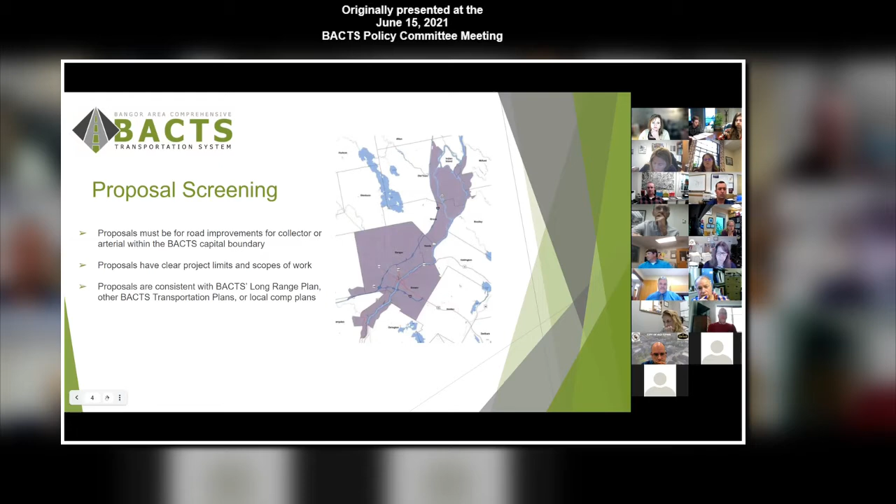There are two types of projects a municipality can submit. Those are roadway projects, which include reconstruction, rehabilitation, preservation, and standalone sidewalk projects. The second type is operation and safety improvements, or OSI. This category includes work being done to any part of a signal system, including ADA upgrades and improvements. Sometimes a project, depending on the complexity of it, may only be funded through the preliminary engineering stage in order to determine a good cost estimate.

All project types are scored against each other and can receive a maximum of 100 points. Scoring is based on a set of criteria. Those include traffic volumes, pavement condition, safety, and congestion. Applications can also receive points if they are on a preferred truck route, community connector bus route, are making improvements to pedestrian or bicycle facilities, or if this is a continuation of a project which was completed in the last 5 years.

After completing the scoring process, BACTS staff presents a project list to the TIP Advisory Committee based on the highest to the lowest score. The committee then develops a priority list of projects and recommends this list to the policy committee. Independent project estimates are then developed by a consultant.

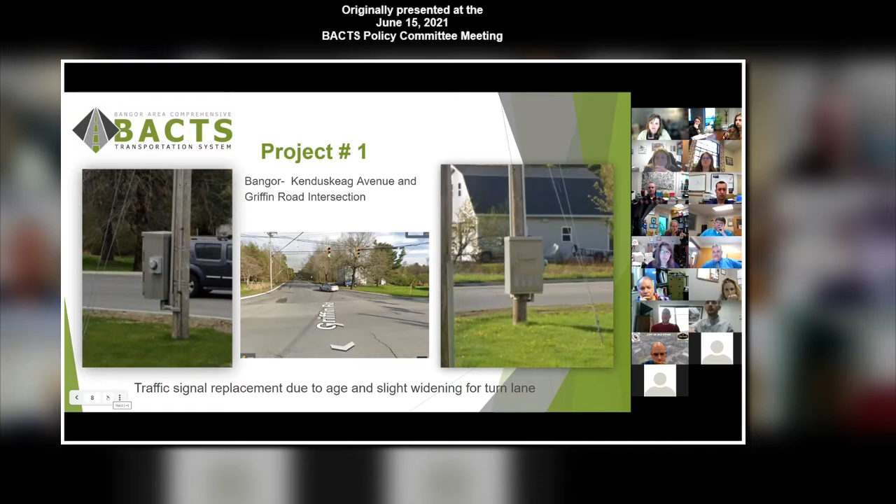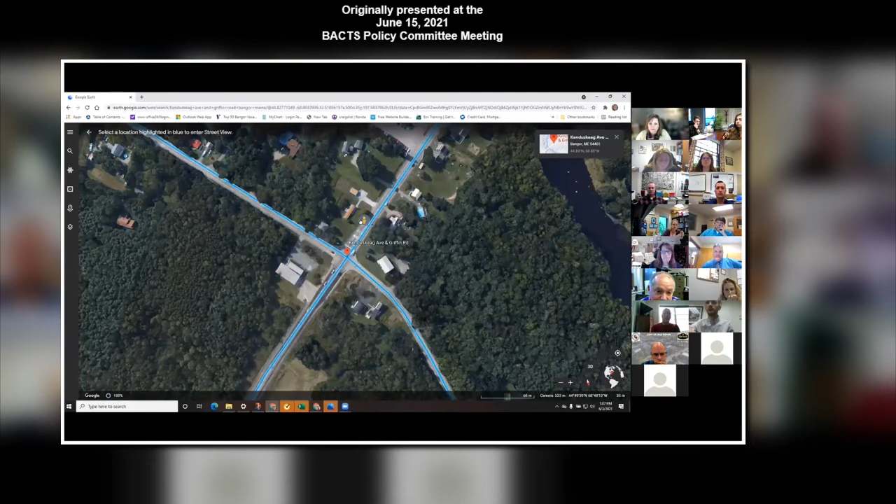Okay, this project is pretty much just a complete signal replacement, traffic signal replacement due to age and condition of the equipment that's out there. We also looked at considering a turn lane coming from Kenduskeag heading out of town. But I guess Sewall looked at that. I mean, this is a repeat project. It was in the scope last go around.

And they kind of ran what they had for traffic volumes at the intersection, and they said it didn't warrant a left turn lane. So we probably won't look at that right now, but when we place equipment for the traffic signal, we may place it so that if future widening is necessary, it can accommodate it. So that's about it for that one. Great. Anyone have any questions?

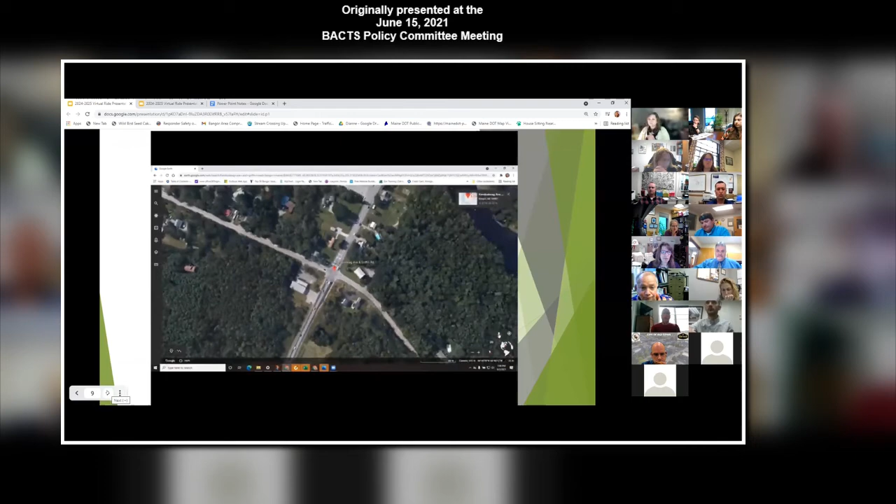Any questions for John? Okay, we'll move on to the next project. This is project number 2. It's a preservation project in Bangor and is located on Outer Hammond Street, beginning at the town line and extending to Hammond Street Extension. In these pictures, I've highlighted some of the distressed areas on this route.

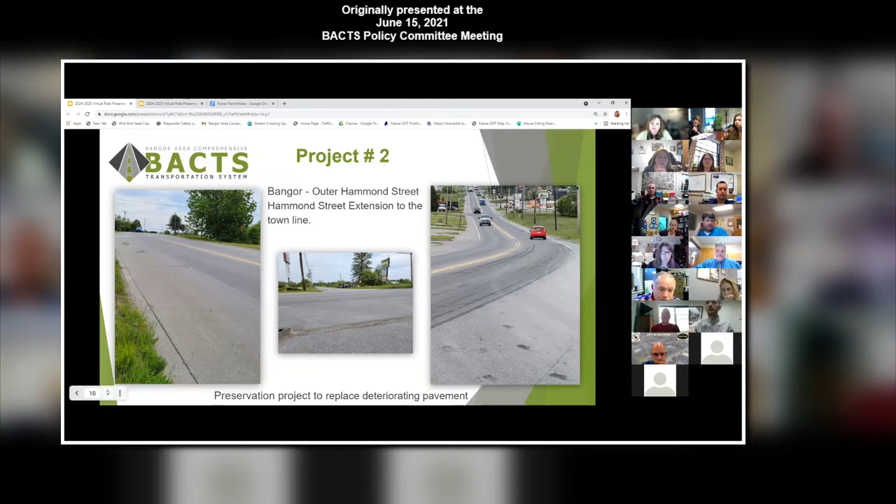And John, again, I'll turn it back over to you as I start the video. Yeah, the project is about 2,300 linear feet of roadway, or 0.44 miles. The roadway is typically about 40 feet wide out there, including the shoulders. What we're looking to do there is, I don't even think we need to mill the location. I think we'll probably look at just placing 1.5 inches of wearing course through the project limits, and that's about it. This is purely a preservation project to keep the pavement in decent shape.

I should have thought of more stuff to say since your video is longer than I could talk.

If anybody has any questions for John about the project, feel free to speak up. Okay, hearing no questions, we'll move on to the next project. This is project number 3. It is also a preservation project, and it's located in Bangor on Union Street. The project limits go from Davis Road to Griffin Road. And these photos show, again, some of the distressed areas that I found while out looking at the project myself.

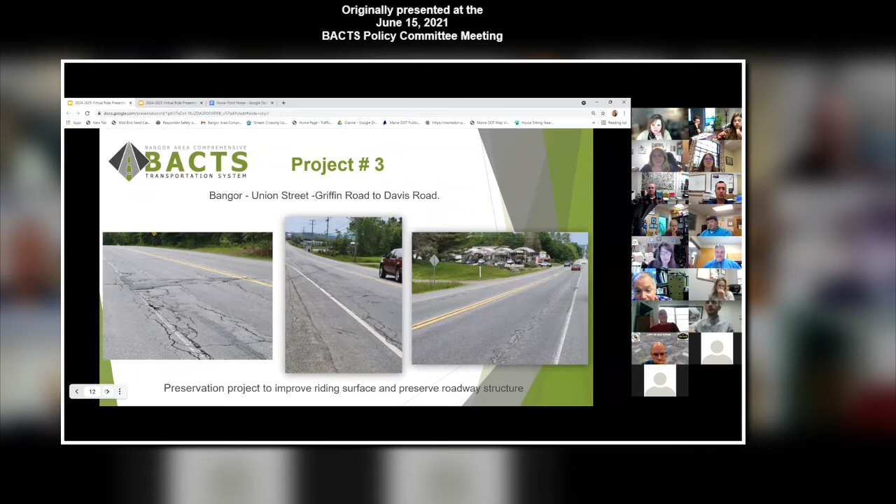Again, I'm going to start the video. John, go ahead and take it over and give us some detailed information. Again, this is about 8,000 feet of roadway, generally 40 feet wide. We're thinking it'll probably be a mill and overlay for the project. We've had a lot of complaints on this section of Union Street between Griffin and Davis Road, which is still in the compact area. DOT did a project not too long ago outbound of Davis Road. And if anyone goes out there and looks at it today, Public Works just did an overlay of this area, like a half inch overlay.

So it actually looks fantastic, but don't be deceived. This is something we had to do because it was in such rough shape. And hopefully in the future we get this thing funded. I don't know if Aaron has anything else he wants to add on that piece of roadway. Nothing to add, other than in the beginning there near Griffin, it is an extra lane. Yeah. It's a little bit wider. Yeah.

Okay. Does anybody have any more questions for John or Aaron? As we wind up the travel down here. All right. And you can see what John was talking about in the distress on the road. It was in pretty bad shape. So I was pleased to see some sort of pavement on it. And I went back out the other day. Yeah, we had received several phone calls. I think people were calling the state as well to bug them to do work on it, and they were bouncing them over to us. So it's definitely needed. And I suspect that little shim layer we put on will get us a couple of years. So when the project is available to be done, it'll probably tie in nicely.

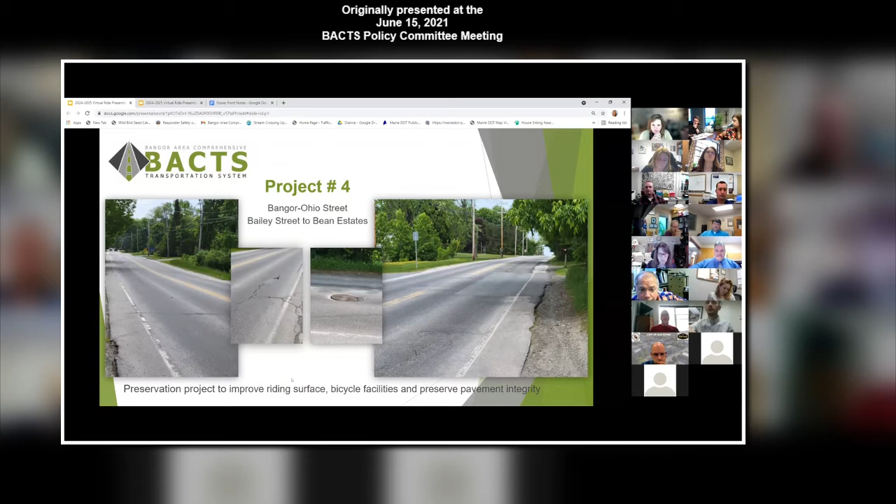Okay, and we'll go on to project number 4. Project number 4 is a preservation project located in Bangor on Ohio Street. This project starts at Bean Estates and extends to Bailey Street. As you see, again, I've highlighted some of the distressed areas on the road in these photos. And as I start the video, John, go ahead and take it over and give the details. So this is about 4,200 feet of pavement. It's typically 30 feet wide. It's in pretty rough shape.

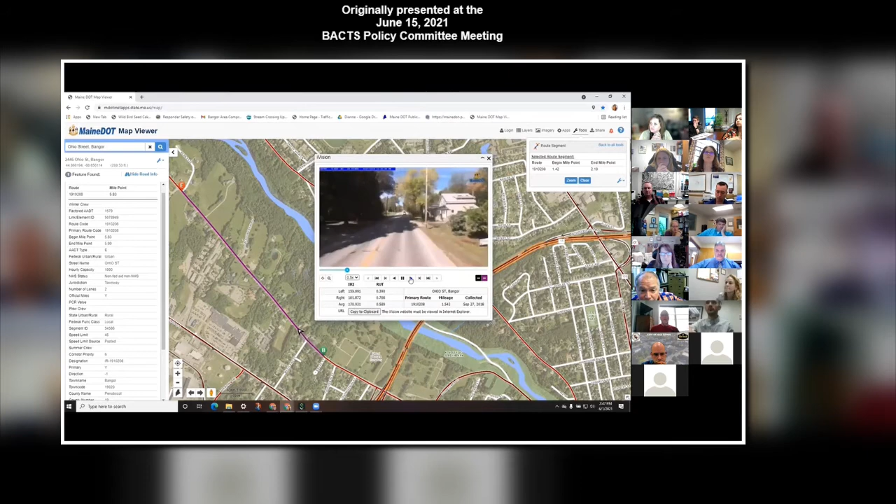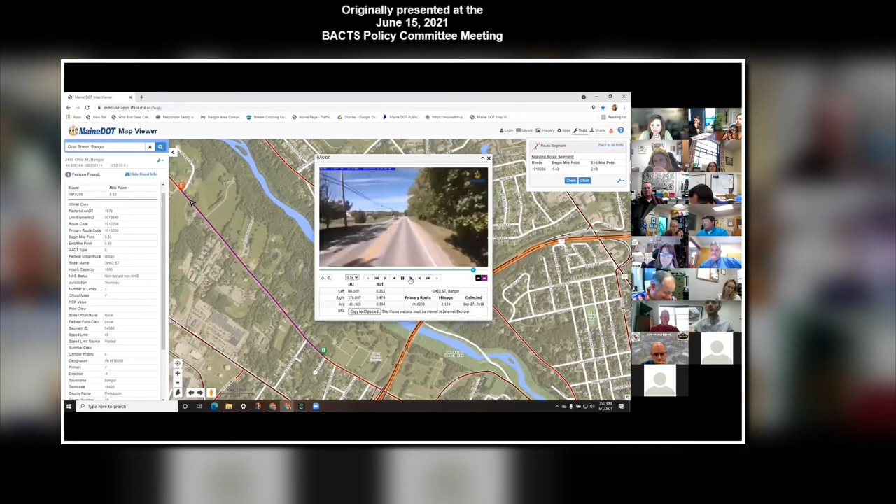There are locations where there's shoulder and then there's not shoulder, so it makes it challenging for bicyclists. So I suspect this will be a mill and overlay and possibly a shoulder widening to make the shoulder more continuous, to improve bikeability. There you can see it kind of falls apart in the video there. So anyhow, that's it. Does anybody have any questions for John regarding this project? All very, very needed projects. Yes. Okay. And we'll move on to the next one.

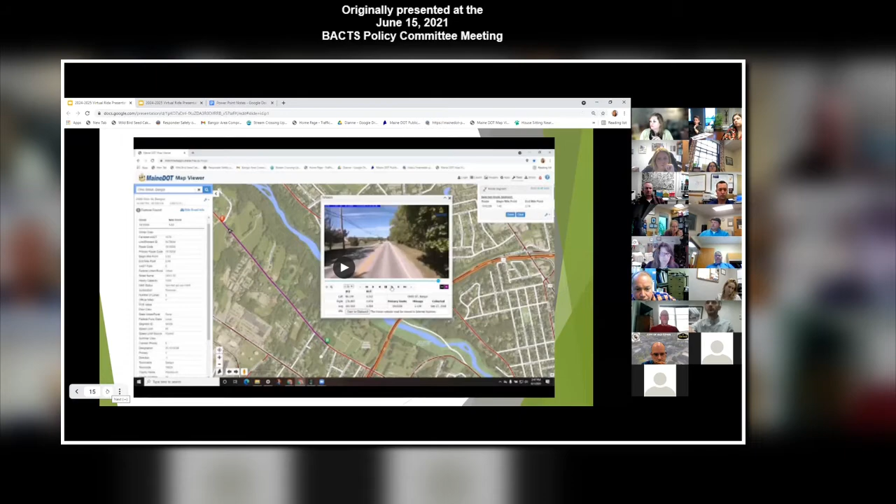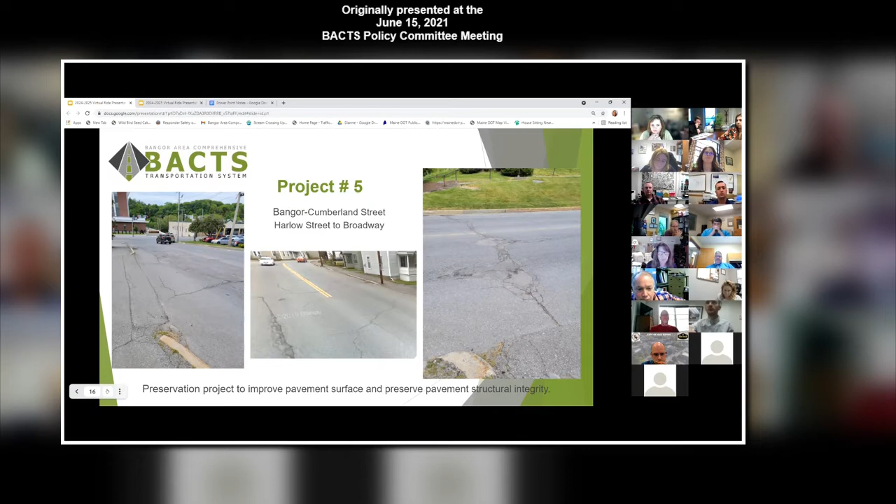Project number 5 is also a preservation project in Bangor. It is on Cumberland Street and it begins at Broadway and continues to Harlow Street. Again, here are some photos focusing on the distressed areas of this project. And just like before, John, go ahead and start your details and I'll start the video. All right, so this is actually an in-town project. It's much shorter, about 1,600 linear feet. Curb to curb width is about 30 feet.

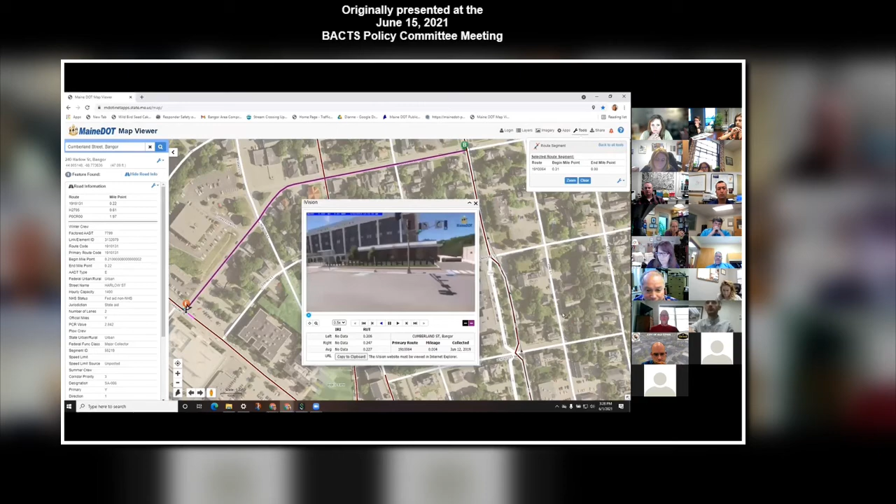I expect this will be a 1.5 to 2 inch mill and overlay in that area, and improve some of the drainage structures out there. We've got curb reveal that's gone in a lot of locations, so we'll probably do some relaying of granite curb and a little bit of sidewalk work out there as well. But with regards to the conditions of the roadway, this one appears to be one of the more severe conditions, at least when you go out there and ride it. That's it. Great. Does anybody have any questions for John on this one?

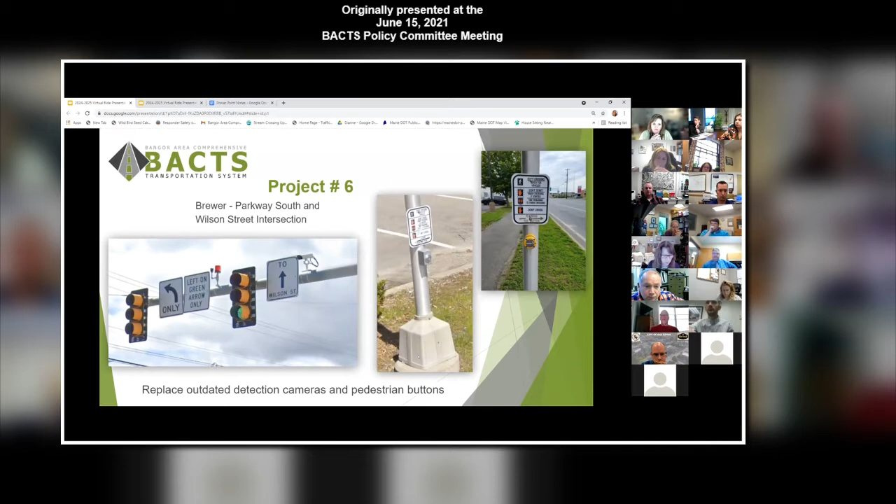Okay, we're going to leave Bangor now and head to Brewer with project number 6 in Brewer. This is an operation and safety improvement project in Brewer located at the intersection of Parkway South and Wilson Street. These photos here are just showing some of the items that will be replaced as part of this project, but I'm going to go ahead and drop into the intersection. And Jeremy, go ahead and take it away and give the details of the project.

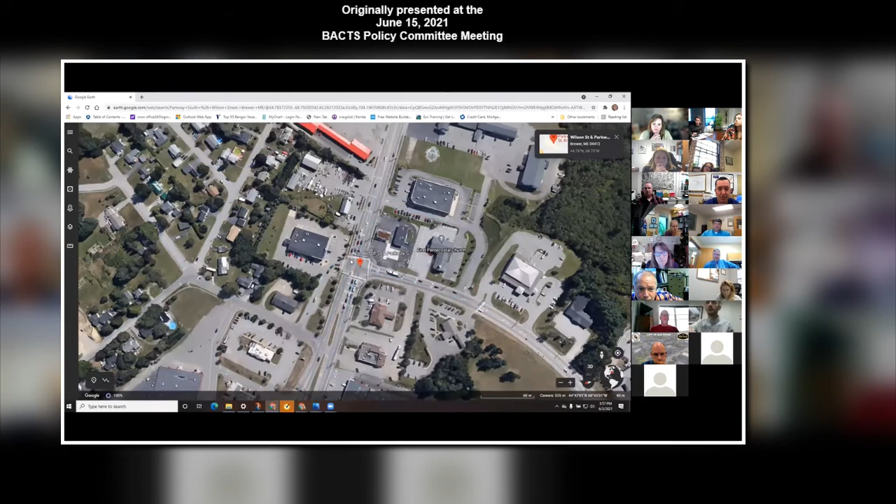Thanks, Diane. Yeah, with this one we're mostly looking at the PED buttons, which don't meet the current standard according to DOT, so we're looking to upgrade those. This is probably one of our heaviest used pedestrian crossings just because it's such a busy area and it's so hard to cross Wilson Street. So we'd like to get the appropriate talking buttons. As you can see from the video, it's kind of a mixed bag of PED buttons out there right now because we've just tried to make it work as best we can.

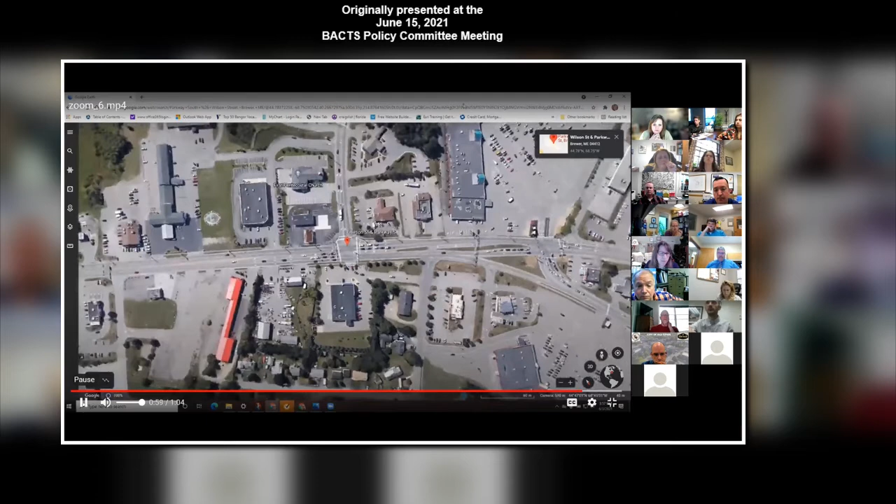And then also the cameras at this intersection are no longer supported by Econolite because they're so old. So we'd like to upgrade these cameras to get a new camera that would be supported. That's about it for this intersection. Great. Thanks, Jeremy. Anybody have any questions for Jeremy on this project? All right, we'll move on to the next project.

Project number 7 is a preservation project located in Brewer on State Street, and the project limits span from the Penobscot Bridge to Eastern Avenue. These are some areas of distress as well as some ADA improvements that Jeremy talked about somewhere around Washington Street. I'm going to go ahead and start the video, Jeremy. You can go ahead and provide us with the details of the project.

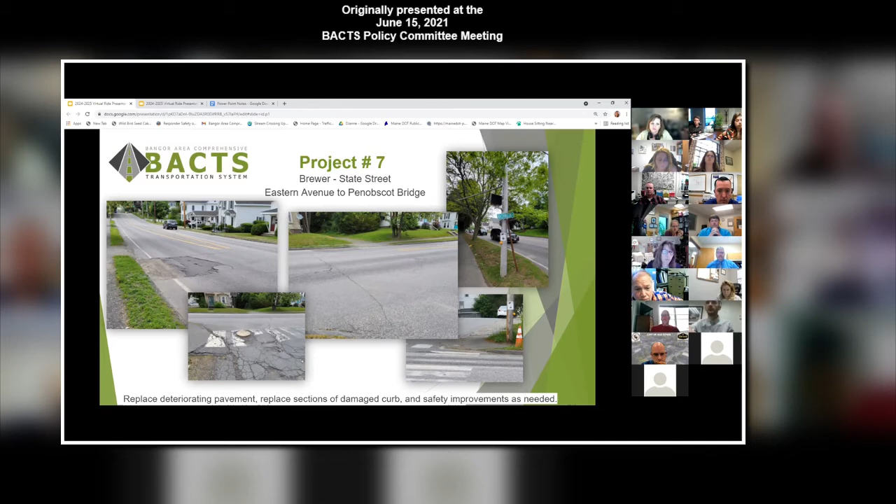So on State Street, we've got a lot of utility patches that have happened over the years, and the road is in very bad shape. And coming up the hill from the Penobscot Bridge, there's just such heavy turning traffic. It's getting worn out pretty well, making that corner up on North Main Street heading towards Route 9. At State and Washington, there's some ramp work needed, and then we'll update those pedestrian crossings as well so that they meet current standards for DOT.

And this project would tie onto an MPI project that we're doing next year that will finish up State Street. Great. Does anybody have any questions for Jeremy regarding this project? Okay, moving on to the next.

Project number 8 is a preservation project also located in Brewer. It's on Parkway South. It begins at the I-395 bridge joint and extends to Wilson Street. These photos again show some highlights of some areas of distress, as well as ADA upgrades near the high school and the I-395 ramps. And Jeremy, I'm going to go ahead and start the video and you can go ahead and give us details.

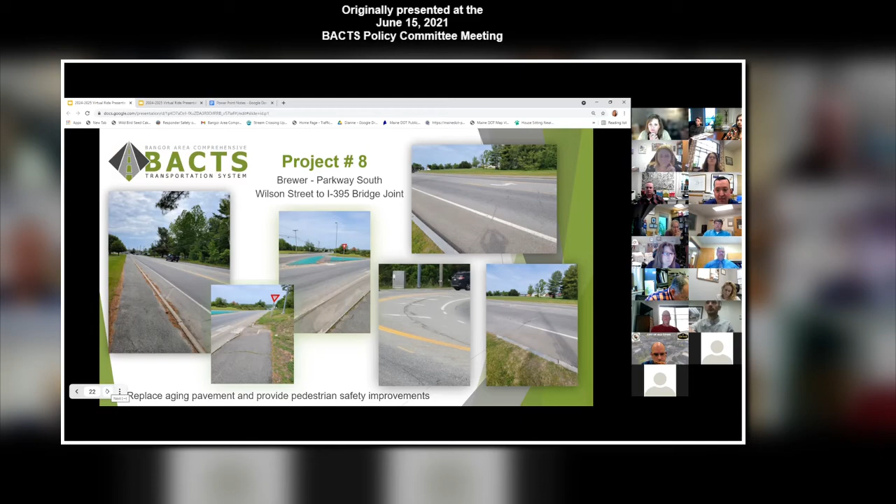And then also by the high school, because that crossing crosses at an angle and it's a very long crossing, they were hoping to create a new ramp area and put in an RRFB, because it's a heavily used crossing right there to go from the high school back and forth to different areas along Dirigo Drive and so forth. So those are the safety improvements that they'd like to see done over the next few years. So we thought it would make sense to package them in with this whole project.

And you can go ahead and talk more in regards to the actual pavement piece now, if you want. Sure. So similar to Bangor, we last year put a Band-Aid on this area to make it last, hopefully for a little bit longer. High used area, we've got some bad wheel rutting starting to happen on the center 2 lanes.

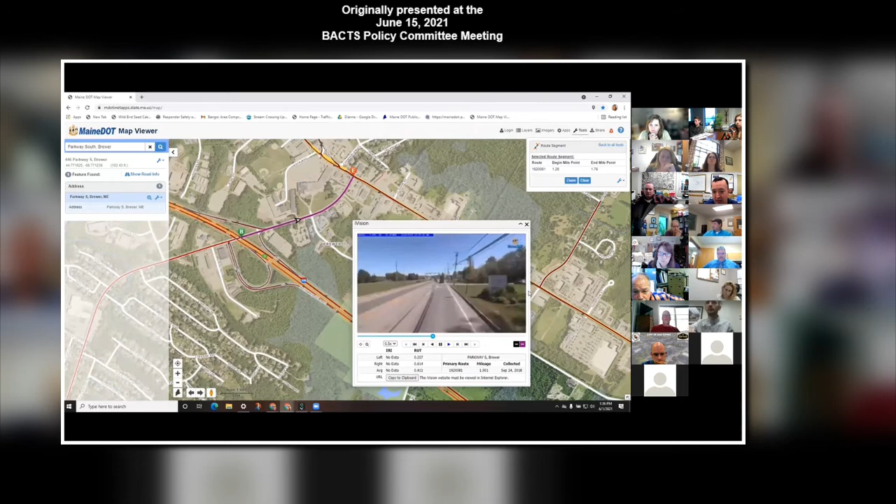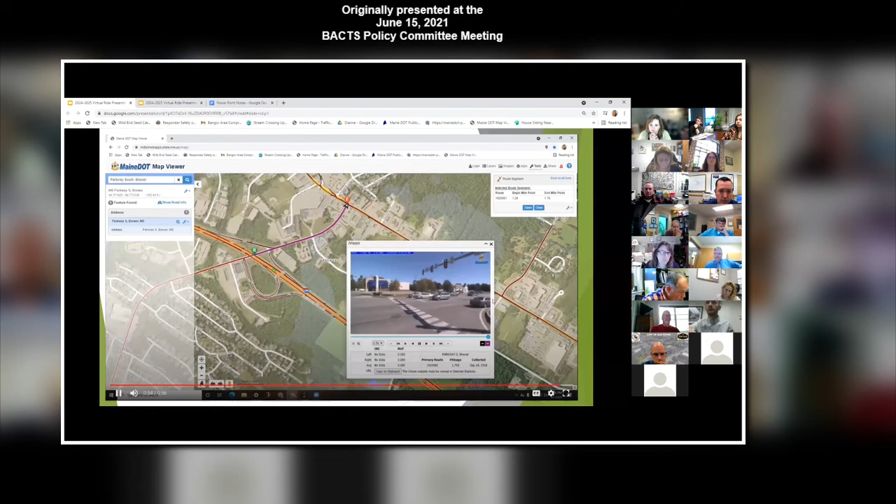Looking to probably do a 1.5 inch mill and fill this whole area here. We have some joints coming apart when we get closer to the intersection. But yeah, looking to do a 1.5 inch mill and fill through here. Great. Does anybody have any questions for Jeremy on any of the pieces of this project? Okay, we'll move on to the next one.

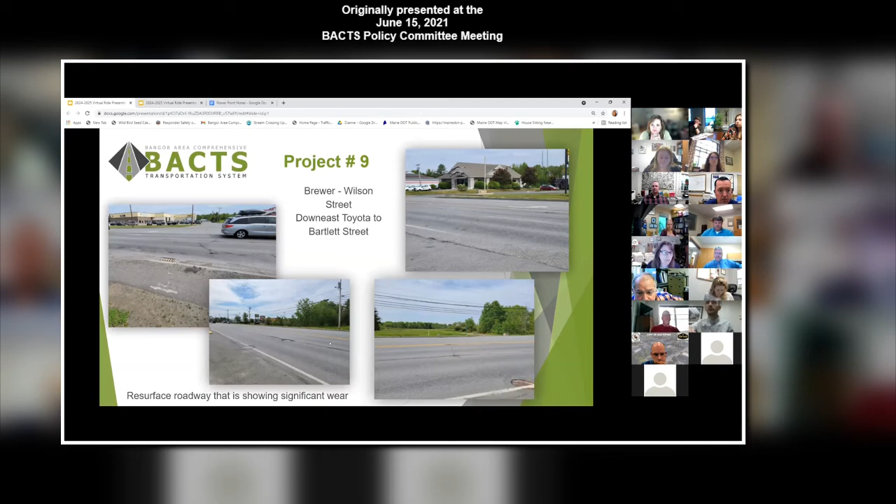Project number 9 is a preservation project located also in Brewer. It's on Wilson Street, and this project begins at Bartlett Street and continues to Downeast Toyota. These photos again are showing some areas of serious distress. And Jeremy, I'm going to go ahead and start the video. You can go ahead and give the details of the project.

So this is a continuation of the last phase of Wilson Street we did that was in very bad shape by the time we got it repaved. We're seeing a lot of the similar issues that we were seeing on that road, a lot of rutting, a lot of joints coming apart, and we're trying to maintain it with patching right now. We do have a few areas that just keep opening up, particularly by the car wash is a bad area for us.

And then we also have a few repairs that were done by Bangor Gas and Water Department and so forth, and those trenches are settling and opening back up. So it's a constant maintenance nightmare for us. Great. Does anybody have any questions for Jeremy regarding this project?

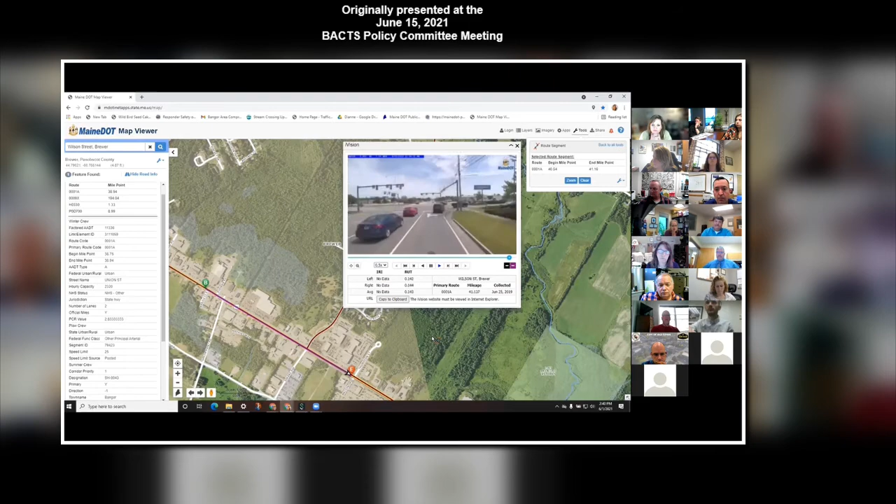However, I do need to say, when I went up to ride this project, I thought I had a flat tire. So much so that I stopped, got out, looked at all 4 tires, only to discover it was not a flat tire, it was the road. I'm going to go ahead and start the video, and Rob Yerxa, I'm going to turn it over to you to give more details.

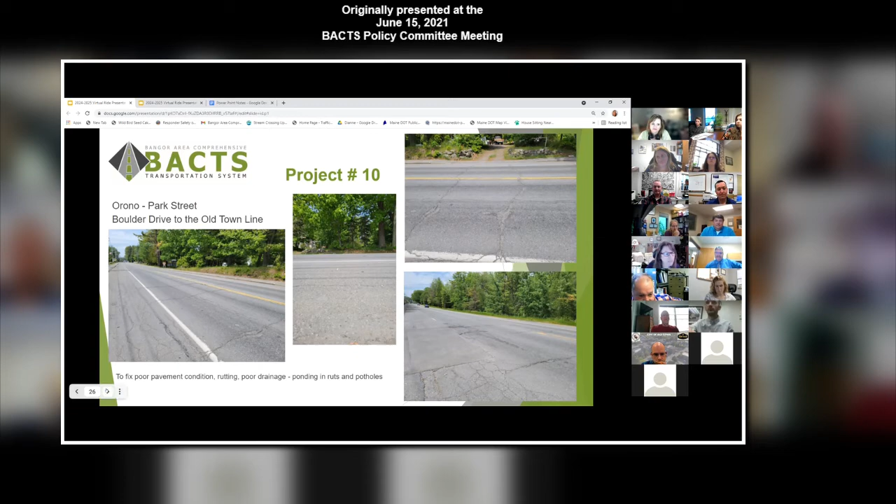Yeah, so this is a piece of Route 2, so what our town calls Park Street. It's a DOT minor arterial that is about, I guess it's about 2/3 of a mile, a little over 3,000 feet. The road condition is degrading quickly. It's got a ton of cracking that goes across the road, so you get those transverse cracks as well as some pretty significant rutting.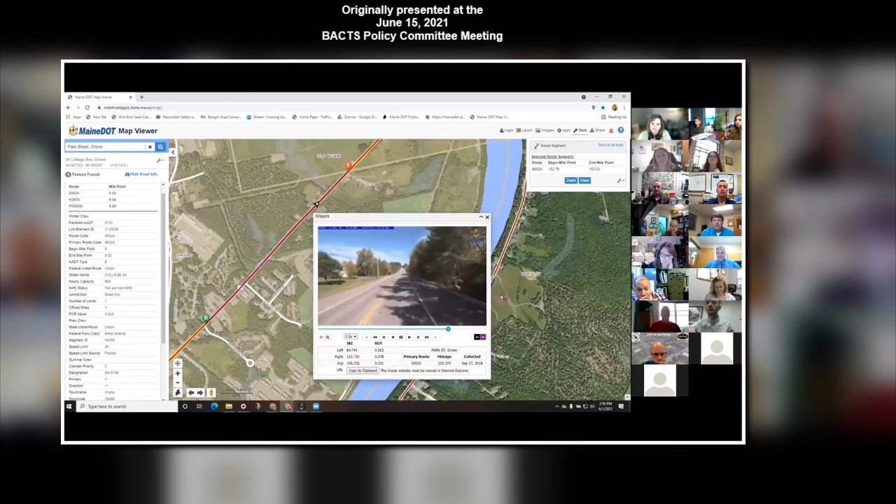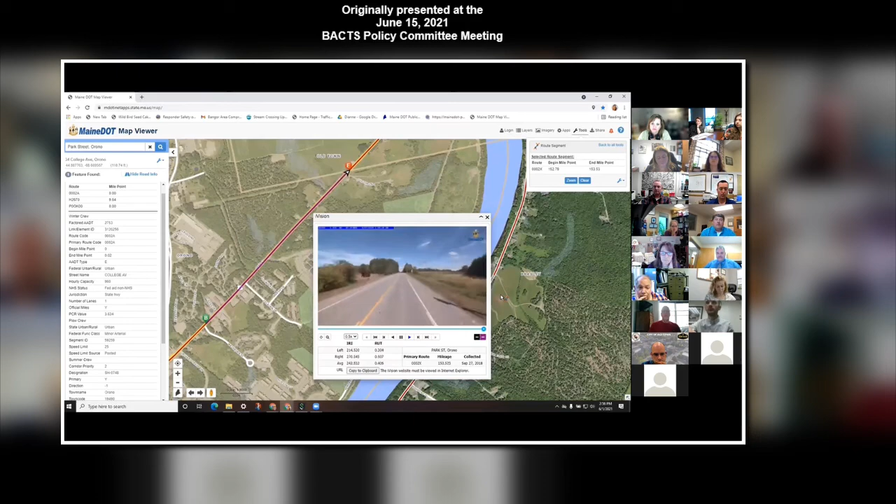We've done a little bit of patching here and there to try to keep things up, but it's due for something more significant. It's a pretty straightforward kind of either a structural overlay or a mill and fill preservation type project that I think is a pretty important piece to our region. It's a primary access point for not only just the connection between Orono and Old Town, but is used as a primary commuting route for people going to the University of Maine from anyone north and east of Orono.

So it sees quite a bit of traffic, and as I said, the condition is degrading quickly. So we'd like to see this one go for sure. Okay, thank you, Rob. Does anybody have any questions for Rob? I just want to make sure I heard correctly, Rob, that you said that this is an arterial road. Minor arterial, I believe. Okay. Great. Any other questions?

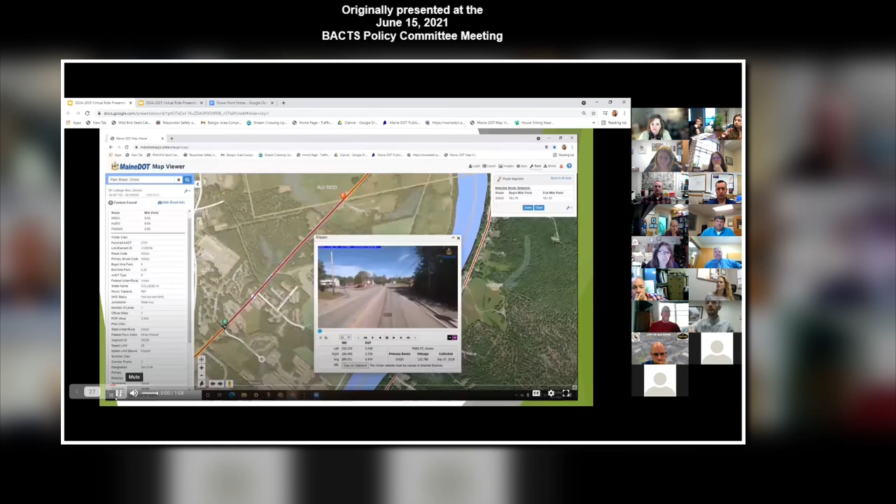Okay, well, this does conclude our trip. So what comes next? Well, the TIP Advisory Committee is going to meet again in July to look at the prioritized list again once we do have the scope and estimates all developed. We will then determine which projects will make the final cut based on our funding restrictions. The Advisory Committee will make the final recommendations to the Policy Committee at the July meeting.

And does anybody have any questions in regards to any of the projects or the process that we go through to get to this determination? And if you do, you can reach out to me directly, or if you have them right now, you can go ahead and ask and we can do any clarification.